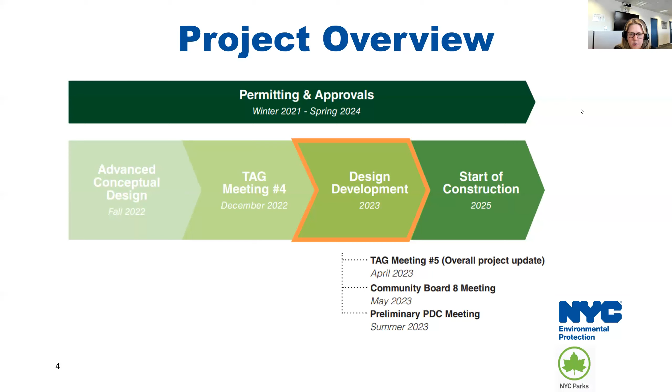Okay, so next slide, Dahlia. I think this just reiterates our project schedule. John can talk a little bit more next about where we're at with the lake restoration. We're looking to complete our design at the end of this year, and then again, we're on track for 2025 construction.

And I think the next slide kicks it over to John, I believe. So John, take it away.

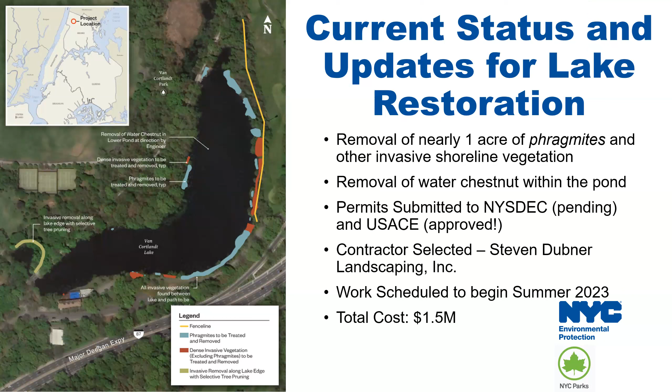Thanks, John. I think I'm next to give an update on the status for the daylighting project.

Just wanted to first recap the past coordination we've been going through over the last few months. We initiated coordination with state DOT as well as city DOT lighting, continued coordination with the DOT bikes unit, and have been coordinating on the Jerome Park Reservoir blow-off connection concept with BWS and gotten approval on that.

We completed our tree survey for the CSX corridor. The tree survey for Van Cortlandt Park had been done last spring, and we prepared that advanced conceptual design, which was presented to the TAG last December.

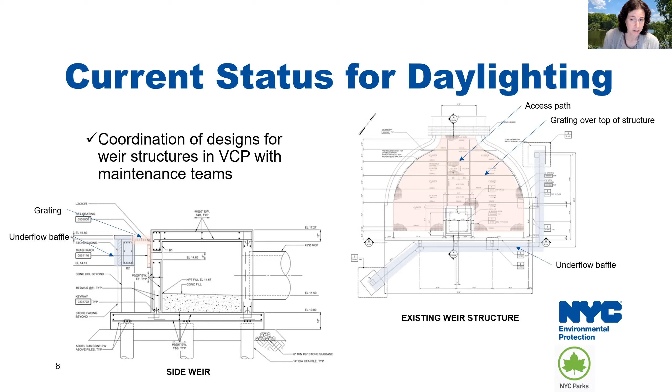Likewise, there's been coordination within DEP with the Bureau of Water Supply on the Jerome Park Reservoir blow-off connection. As folks may remember from past meetings, there is a connection for the Jerome Park Reservoir blow-off that runs through the park, through the daylighting project, and we're able to daylight some of that stream flow, some of that water from the Jerome Park Reservoir.

Can I come find you? Sorry, if somebody can mute themselves in the background.

So we're able to take some of that water from the Jerome Park Reservoir that currently gets discharged to the combined sewer and daylight it into the stream instead, into our new daylighted corridor. We're really working through the details of how that can work with the operations staff from BWS, to make sure the structure is secure from a security standpoint and that it can be operated easily with their maintenance staff and vehicles. We've been working through that.

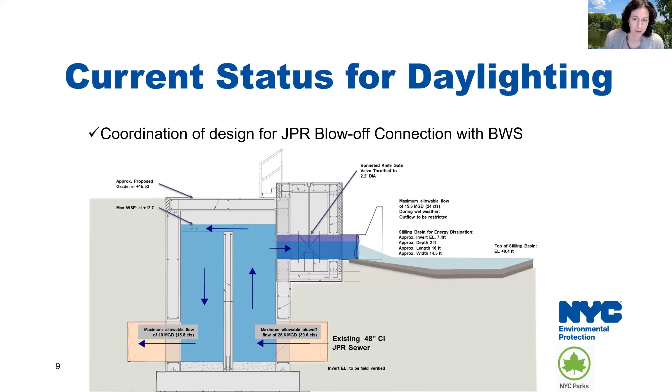And then, as discussed, we're really taking this schematic, conceptual design and turning that into construction drawings. That's just a level of detail that's required that takes a lot of time and coordination across all of our large design team.

So just for example, this is one location at Van Cortlandt Park South, south of the parking lot, and just how to take that area and turn it into detailed design drawings.

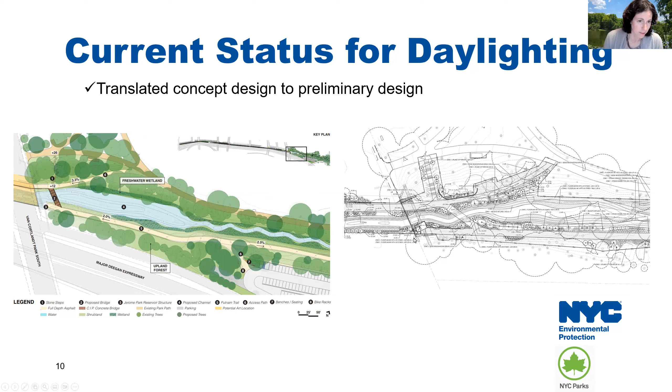We've also introduced the project to the DEP stormwater permitting team. We've prepared the preliminary design that's currently under review by the various involved agencies, detailed the hydraulics memo that outlines the hydraulic features associated with this project, through that 75% preliminary design submittal. We're also considering how the public art spaces can be finished in such a way to incorporate that future public art program.

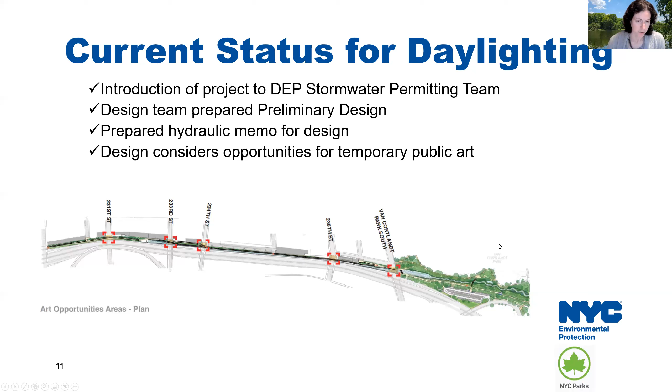Some of the activities that are ongoing are agency reviews of the preliminary design, working with Metro North Railroad as well to review the preliminary design. We've been working to coordinate closely with the DOT bridge unit, advancing a lot of the really detailed landscape design now that all the hydraulic features are completed within the parks portion of the project.

That's being prepared in anticipation of the CB8 meeting next month, and then the PDC preliminary design submission. So at the CB8 meeting is when we'll get into a lot of those really detailed design pieces. You can look out for that next month.

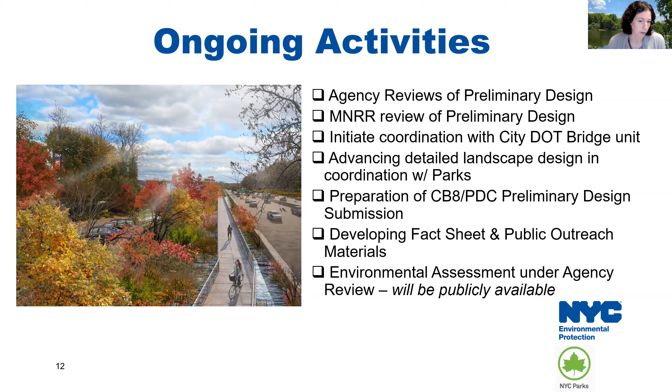We are also developing a fact sheet and public outreach materials, and finishing up a draft EA that will be made publicly available once it's out of agency review.

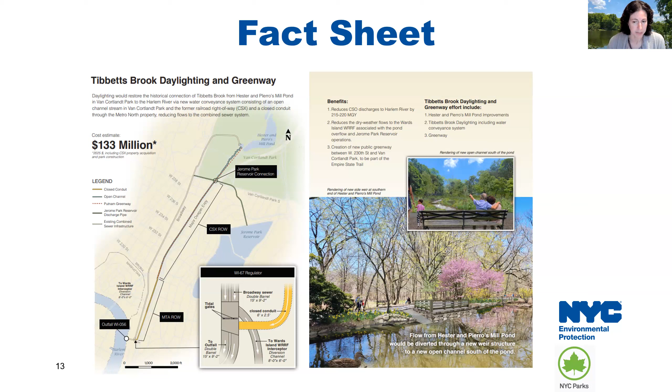And just to note on the fact sheet, we are preparing a publicly facing fact sheet. We've updated the fact sheet for some internal reporting, but that will continue to be updated with the latest graphics once we get through updating some of those graphics in anticipation of the CB8 and PDC submittals.

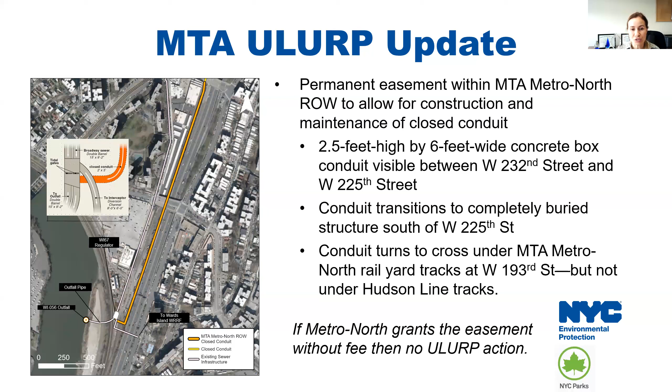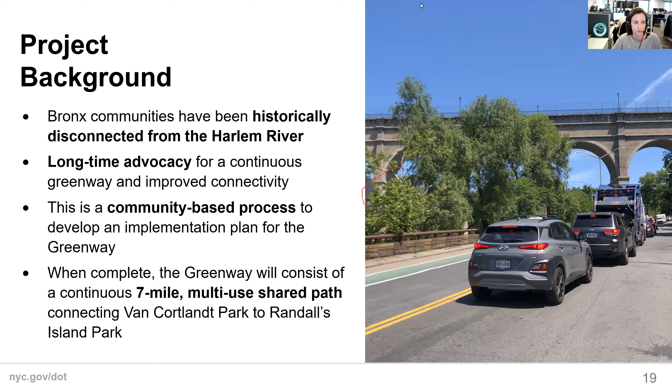Next slide, please. Thank you. Lots of people have different ideas in their mind when they think of what is a greenway. Here at DOT, we're particularly focused on the transportation utility of greenways. And we think that greenways are useful in their continuity. So the continuous aspect is key, and that's why our end goal is to have a continuous 7-mile greenway along the Harlem River in the Bronx.

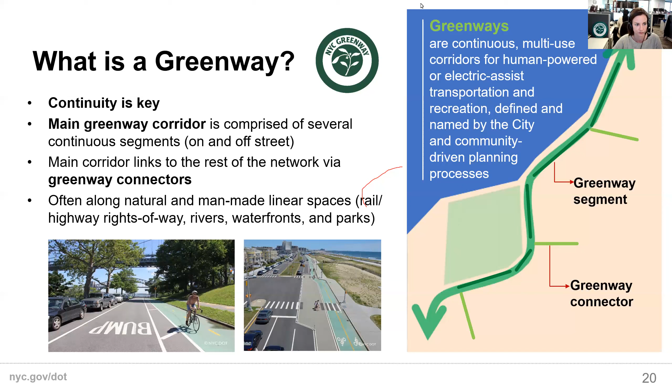The benefits of greenways are, I think, innumerable, but to name a few, primarily our focus at DOT is transportation, getting you from A to B. So that's both for utilitarian transportation, for commuting purposes, and also for fun, to see your friends, for recreation, etc. Something I like about greenways is the opportunity for active travel, biking and walking, which we know is proven to improve health outcomes.

Moreover, greenways encourage sustainable modes of transportation and can bring people together through recreation and leisure. With past greenway plans we've developed in other areas of the city, we've noticed significant benefits to the local economy too. And importantly, greenways also connect people to nature, the greenery around them, and in this case, to the waterfront.

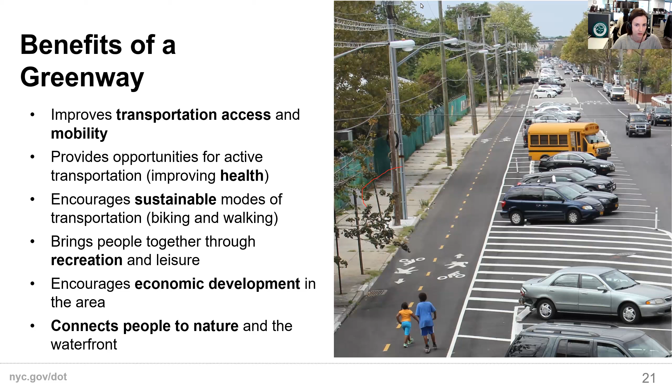So some of our project goals, just to reiterate, is again the comprehensive plan for the continuous, safe, and accessible path. We're really eager to work with community members and hear your ideas. Something I'll touch on in just a minute is, what can we do in the short term? What can we do now, outside of a capital construction process, to improve conditions for biking and walking along the Greenway study area?

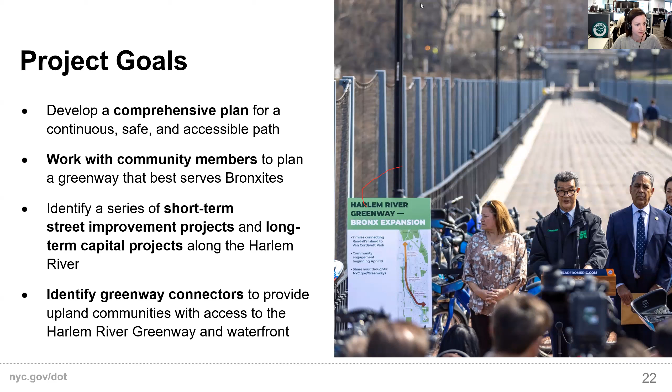The overall project's schedule: this month, in April 2023, we are finishing up our first series of public workshops, which are focused on gathering info about the existing conditions and ongoing projects that we know about in the area, sort of getting an inventory of what's there and what's in the pipeline.

Then over the summer, we're going to be working diligently with our consultant team to take all of that feedback we've been gathering and identify potential project routes and specific ideas for individual segments and connectors. Then we'll be coming back in the fall to present some of those more specific ideas, which we will then be wrapping into a comprehensive planning document. I do just want to say that throughout this process, as opportunities arise to implement projects quickly, we're not going to wait. We will seize those opportunities whenever we can.

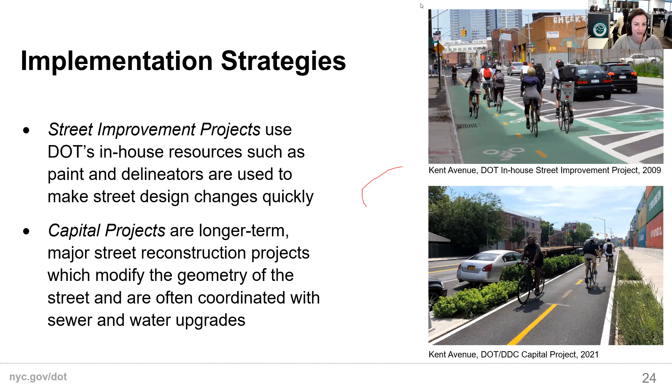But these sorts of things take several years, so in the near term, we're focused on what we can do right now.

So to orient you to our study area, we've broken up the 7 mile geography into 3 sections to make it a bit more manageable. The area most relevant to you all for this Tibbetts advisory group is the northernmost section, between Van Cortlandt Park and the University Heights Bridge. We had the workshop for that area last week.

Similarly, we already had the workshop for the University Heights Bridge to the Macombs Bridge area. But if you're interested in this process, and you know that third area from the Macombs Bridge to Randall's Island, I would encourage you to join us this Wednesday for a workshop on that area and what the Greenway can look like through that location.

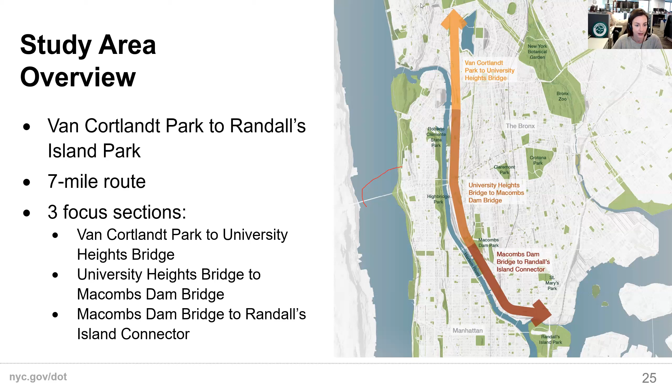Oops, I just sort of stole my thunder there. And for those of you who have additional ideas but weren't able to make it to the workshops, or are only just hearing about it now, I would encourage you to submit any comments, ideas, suggestions, complaints, etc. in our online feedback portal. I'll drop a link into the chat right now.

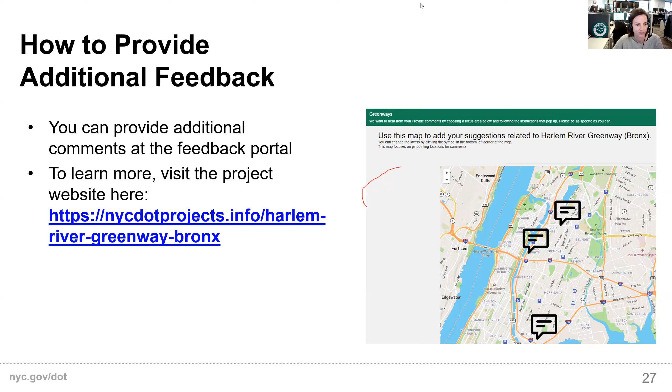Hi, good evening. My name is Rupesh Joshi. I'm the Managing Director of Green Infrastructure for Design and Construction for DEP. I've been working with the design team. Amy Mosney is the DEP project manager. She couldn't be here today, but she will be there along with many of us for the site visit on Thursday.

I'll quickly go through the site visit and the paths we're taking. We're meeting at Vervelen Place, and we'll give you the exact address on the next slide. On the CSX property, there is a gate for us to enter through. We'll first head south from Vervelen Place up to the end of the CSX property on 230th Street. That way we'll get to take a look at the MTA property as well. Then we'll head back going northwards onto the CSX property, and we can discuss what the site looks like.

You'll be able to see all of the issues at the site, like buildings with low windows. Also at the site, we could talk about where we would have filling or excavating, and some of the issues with regards to the site as well. In the next few slides, we can also see what's being proposed.

So on Thursday, we'll meet at 9 a.m. on Vervelen Place between 230th Street and 231st Street. Like I said, there is an entrance for us to get onto CSX property. If you're taking the train, the station is close by. If you take the number 1 train, or if you're taking the car, there is a parking garage that you could put the address on. Although the address is 230th Street, if you just walk over to Vervelen Place, there is an entrance to the parking place as well on the other side.

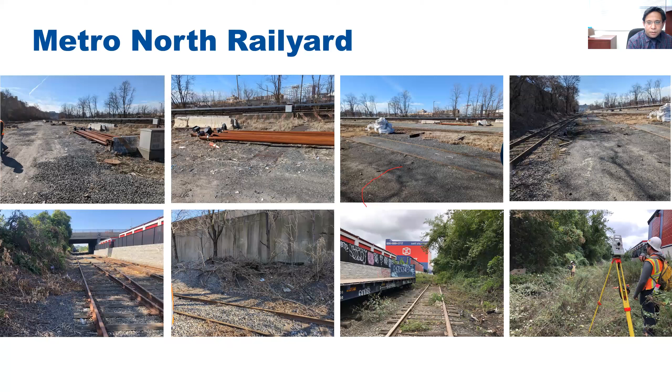So this is what the MTA, the Metro North site looks like. The bottom left is probably what we'll see from 230th Street. On the left-hand side, underneath that embankment is where the closed conduit is going to go. The first two photographs, and actually the first three, show the crossing on Metro North property. But most of the areas we'll be able to see are going to look like the photographs at the bottom - just a narrow pathway.

So from 230th Street, after observing the Metro North area, we'll walk up. Anyone that might be late will be able to probably see them as we go up to 231st Street.

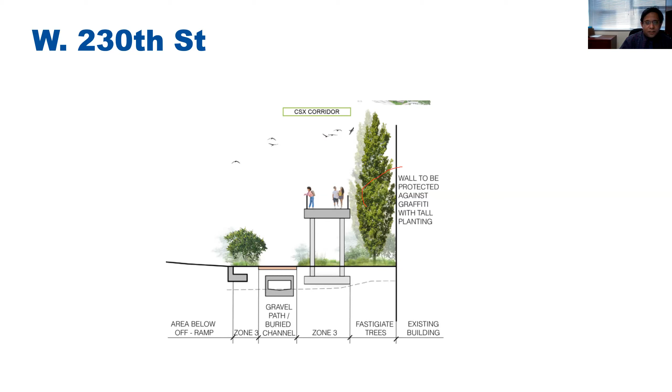From 230th Street, if we're looking north, this is what we'll be able to see. What's being proposed is the walkway. It's an elevated walkway, and you'll be able to see - it's because we're going to put a channel there. There isn't that much space just for the pathway, so that's why it's being elevated, and you can see the narrowness of the area.

Again, just the picture that I showed you earlier, but this is just a rendering of it. We're still working through the details, but more or less, if we put a rendering, it's going to look like this.

So as we walk up from 231st to 233rd Street, we can see the exact location of where the channel changes to a closed conduit. Label number 3, that's where we have this intake structure, and that's where the water will go into a closed conduit. It is taking place on CSX property. One of the reasons for doing that is also because the buildings in that area have really low windows, so we couldn't put an open channel there.

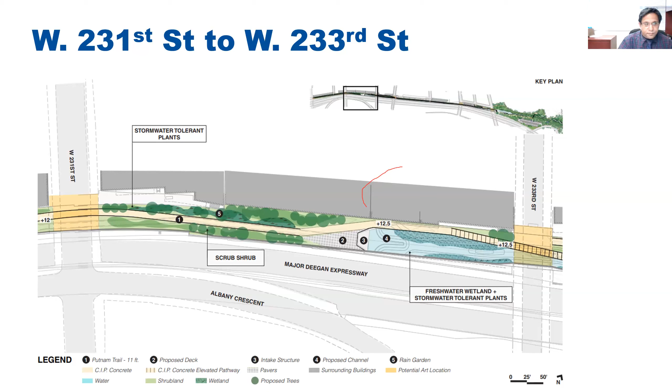Again, from 234th Street, if you look north, this is what the pathway is going to look like.

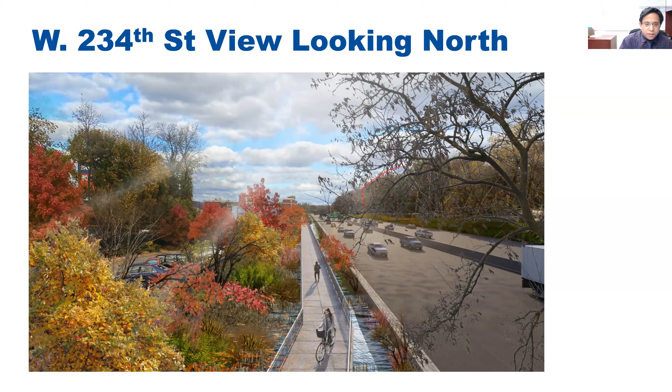Next slide. We'll walk up from 234th Street to 236th Street. Again, we'll go over the different issues. The pathway sort of changes. We'll talk about where we'll excavate, where we'll have fill, and we'll look at the issues with the buildings as well. We've been talking to some property owners, and we're also working on different easements, which we'll discuss during the field visit.

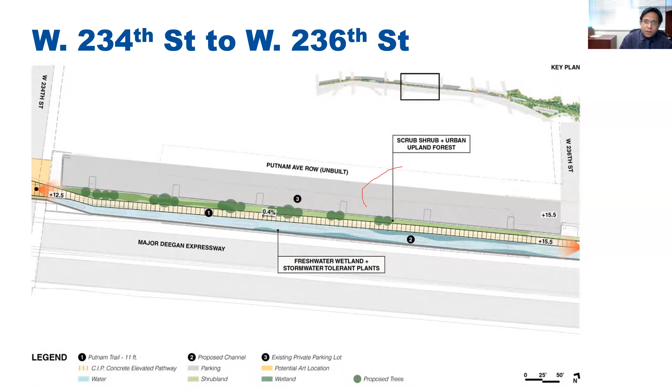Next slide. Again, as Pinar mentioned earlier, and Dahlia as well, we're working through the design, and these are what our design drawings look like. Next slide.

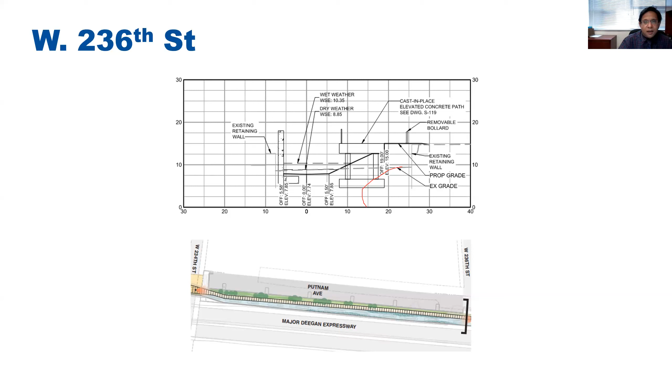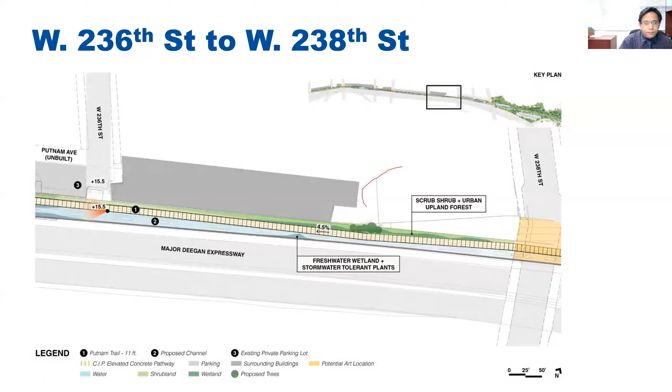We'll probably stop at 238th Street. It does go a little further, but as we walk there, if you could bring your boots—it is grassland, but it does get mucky, so we'll stop around this site. Next slide. Thank you.

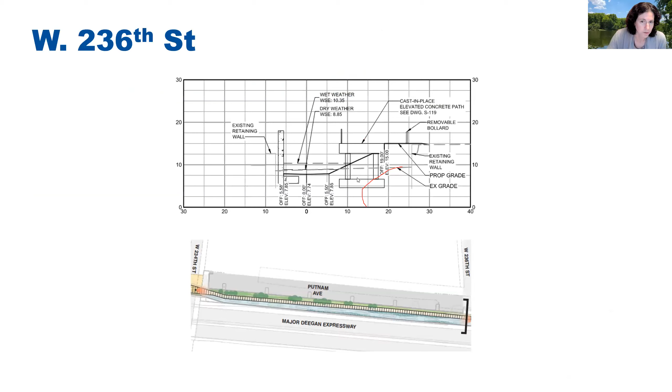I'm not sure who wants to jump in on that. I think I can take that. Perfect. So here, I will go back here at the meeting—sorry, I think one more slide. Yes, so at the advanced schematic design meeting last December, this had been the recommendation, and that's what we are going to be moving forward with.

Access points at West 230th Street, Verveelen Place, West 233rd Street, West 239th Street, and Van Cortlandt Park South through the park. We were also going to explore access through private property at West 236th Street, through the parking lot of the Riverside Crossing facility. Parks has been negotiating with the property owner, and it does look like that easement is going to move forward. So our design is taking that into consideration, trying to incorporate an at-grade access. But those are the options that were presented at the December meeting, and that's what we are moving forward with in the design.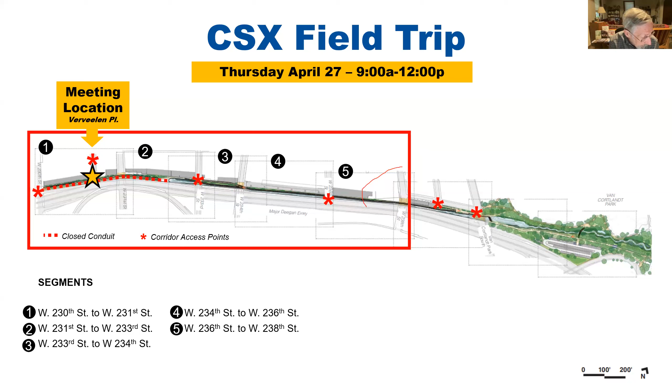Thank you. Back in the Metro North slides, there was some slide that said the conduit would cross the Metro North rail yard at West 193rd Street, but would not cross the Hudson Line tracks of Metro North. But the brook itself is going into the Harlem River, and I don't understand how it's getting into the Harlem River without going under the Metro North Hudson Line tracks. So either I'm misunderstanding something or the slide wasn't clear.

I can answer that. Okay, Cindy, if you wanted to answer that? Yeah, so the connection will be—there's an existing regulator there, and our pipe will connect downstream of the tide gates.

And utilize the outfall that already exists crossing the Metro North tracks. As you can see on the slide, the yellow line joins just downstream of the regulator, and the white line shows the existing outfall pipe that discharges into the Harlem River.

Yeah, okay, that's exactly what I had always understood. I don't know what that was, there was a different slide that said something about 193rd Street rail yards, wherever that is. But you've answered the question and clarified it, which is all I cared about.

I just wanted to mention one other thing. I know this is a TAG meeting, but the question of the Harlem River Greenway has come up. We're also working on a Hudson River Greenway, and the study area goes down to Spuyten Duyvil. I hope we can extend that to make the connection about 1 mile farther south to this exact location, where we can connect to the Harlem River Greenway and the access point to Van Cortlandt Park. So I just want to remind everybody there's another greenway in the Bronx we're working on.

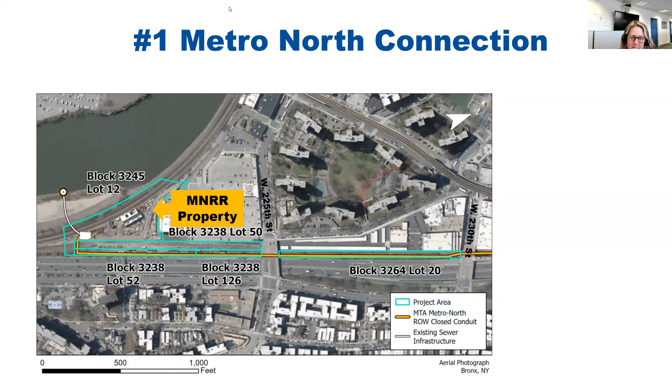Good, good. I had a question in the chat, which was more engineering at 230th Street. But before you answer that, I wanted to let you know about an Environment Committee meeting we had last week with the MTA, in which Community Board 8's Environment Committee really addressed the issue of the currently fallow land you're talking about, and the environmental justice implications of moving the region's garbage into Marble Hill. We wanted you to know there's a recording of the meeting, and that we're really committed, for all the reasons Chauncey, Deb, and others have said, to getting MTA to work with the city. So let us be your advocates for that — it would make life better for so many reasons, as you say. We will send that recording along to you.

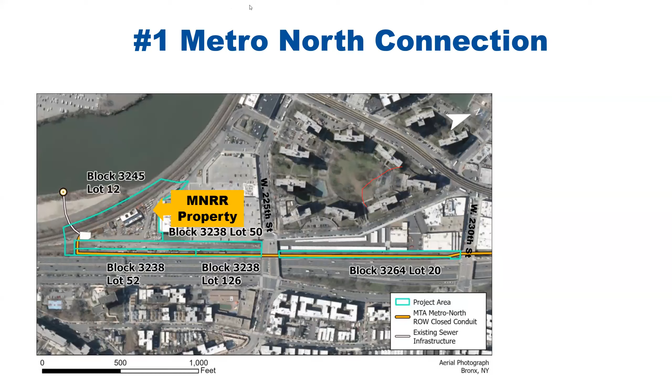But the meeting's recorded. I did want to talk about the cross-section slide where we saw that person on top of a structure at 230th Street — where do they go? I know you have a lot of scenarios to keep in mind right now, but how does that person get down from the Greenway currently? Do you have that planned yet?

Where do they end up? Here's a plan view, and the cross section was roughly in this area. There's going to be an entrance at 230th Street for people to continue and go north, just as an option other than Verveelen Place.

So will there be two entrances, a Verveelen entrance and a 230th Street entrance? Yes. And can you do that at 230th, because before you were talking about too much of the acreage being used for stairways and handicap accessibility to fit within the width.

So that's good news. You actually have a route, an exit ramp or stairway down from 230th. It's going to be a ramp or path, not even officially a ramp, because we're under 5%. Okay, great, that's what I wanted to know.

Just want you to know about MTA, and we really want them to be part of planning, as they've done throughout their Empire State planning process in New York State. So thanks for everything you're doing here. We look forward to seeing you next month at the community board too.